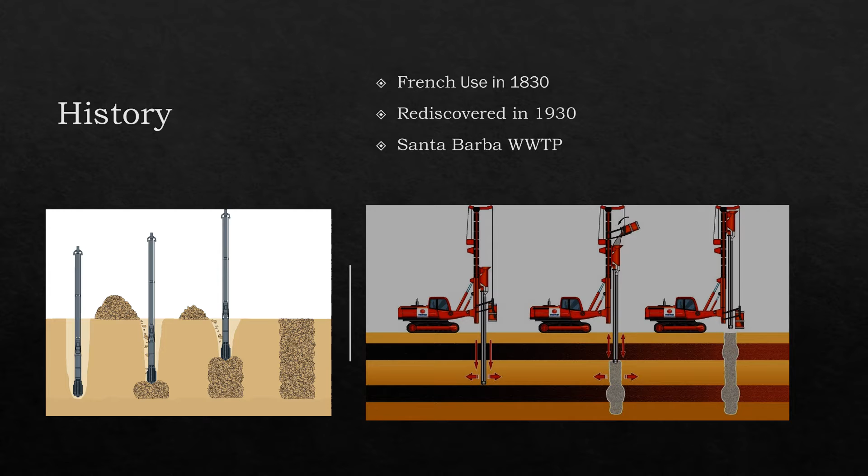What exactly is Vibro Stone Column? Vibro Stone Column is a method used to improve properties of soil so that it can be able to withstand the weight of a structure. Cohesive, mixed and layered soils generally do not densify easily when subjected to vibration alone. Vibro stone columns can be used for erratic soils, which include cohesive soils.

The densification and reinforcement of soils is accomplished by the wet top or the dry bottom feed method during the installation process. Vibro stone columns of dense crushed stones are designed to increase bearing capacity, reduce settlement, assist with densification, mitigate the potential for liquefaction, and improve shear resistance.

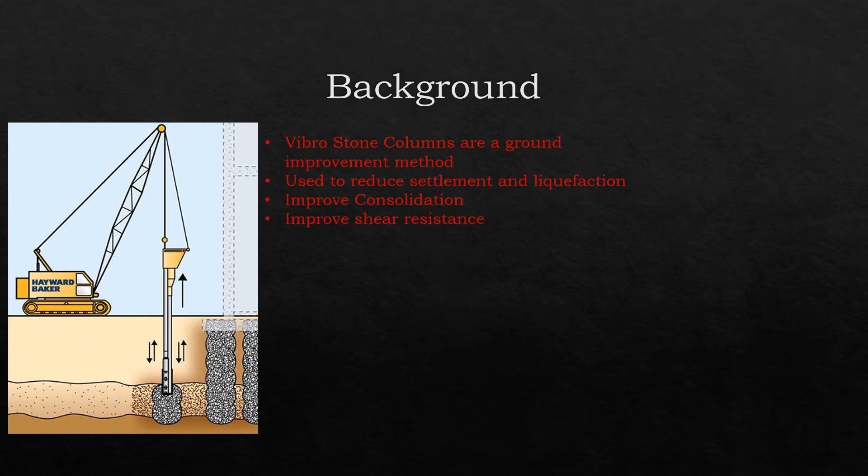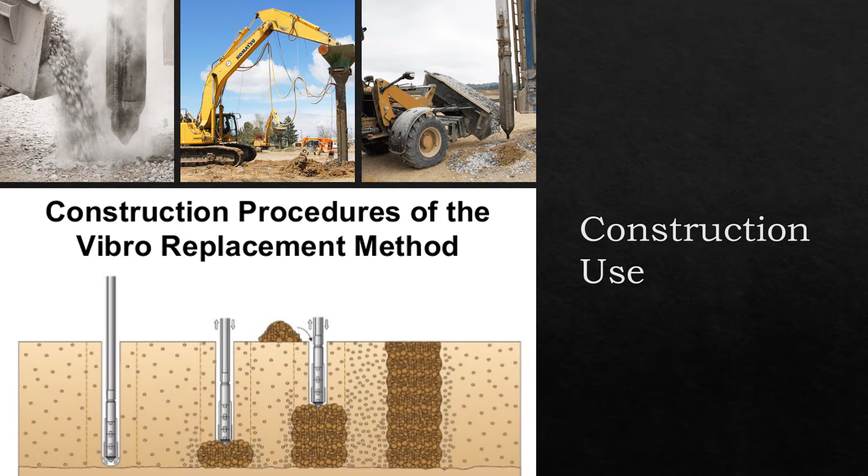When it comes time to install stone columns, there are two methods that engineers can choose from. These methods are the wet top and dry bottom method. The wet top method consists of jetting water as shown in figure 1. It is used to remove soft material, stabilize the probe hole, and ensure that the stone backfill reaches the tip of the vibrator. This is the most commonly used and most cost efficient of the deep vibrator methods.

However, handling of the spoil generated by the process may make this method more difficult to use on confined sites or in environmentally sensitive areas. The dry bottom feed method is a completely dry operation where the vibrator remains in the ground during the construction process. The vibrator is equipped with a pipe which feeds stones and aggregate to the tip of the vibroflot without being withdrawn from the bore as shown in figure 2.

The elimination of flushing water in turn eliminates the generation of spoil, extending the range of sites that can be treated. Treatment is possible up to a depth of 80 feet and is not inhibited by the presence of groundwater.

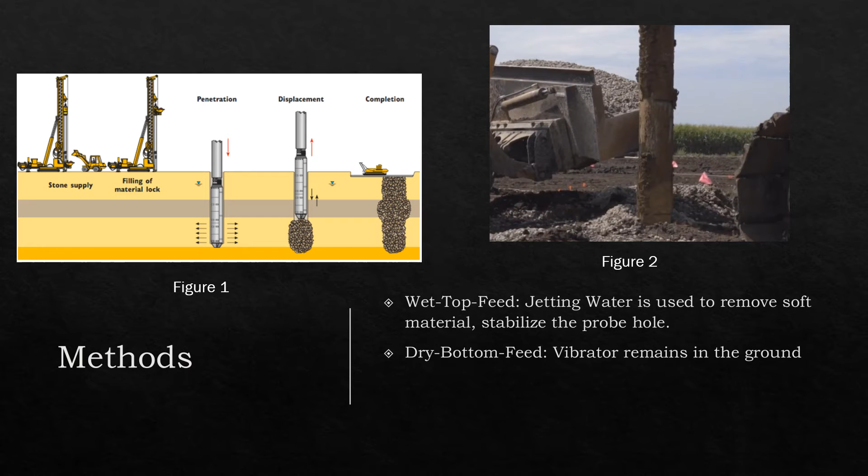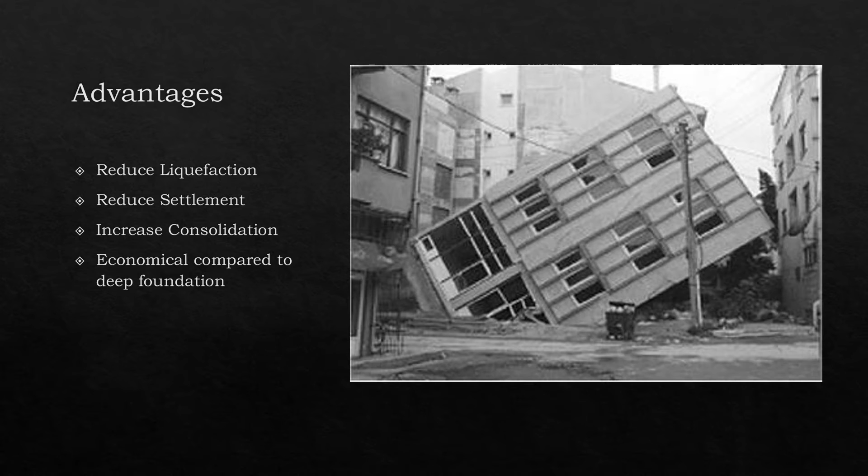The goal of Vibro stone columns is to reduce shallow foundation settlement, increase bearing capacity, which allows reduction in footing size, mitigate liquefaction potential, provide slope stabilization, permit construction on fills, permit shallow foundation construction, and prevent earthquake-induced lateral spreading.

With all things, there is always the probability of things going wrong. The use of stone columns and any other ground improvement techniques requires the user to fully understand why and how such technique will improve the soil that a certain project will be constructed on. Failures of stone columns are the result of inadequate site and in-ground investigation, failure to identify the main risks or deficiencies in the ground, failure to understand the science and application of stone columns, lack of training in installation of stone columns, failure to consider the rate the load is applied in soft soils, and not consulting a stone column specialist.

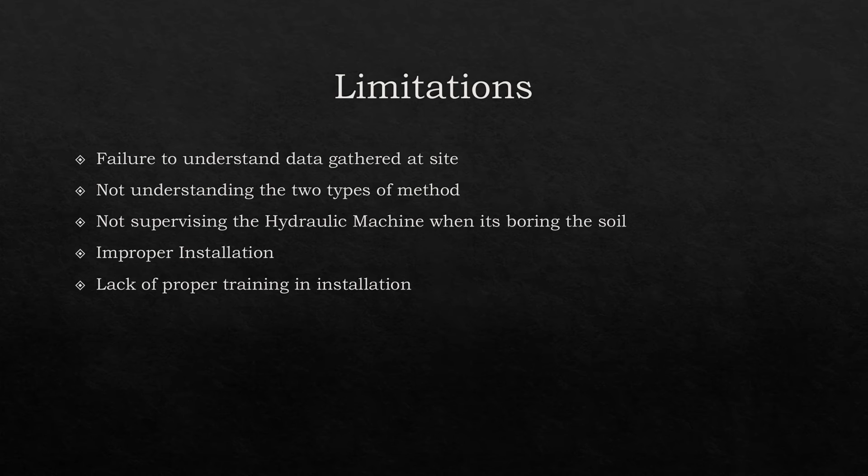For example, the failure of stone columns beneath an 18-meter diameter liquefied gas sphere constructed on a rigid concrete pedestal foundation in India was the result of not understanding the data collected at the site before the installation of the stone columns during testing.

With all the benefits that stone columns have to offer as a solution to improving the strength of a foundation, more research needs to be done to learn more about this soil improvement method. Stone columns are very useful in areas that are prone to earthquakes, reduce settlement, improve rate of consolidation, and prevent liquefaction. As the population of the world continues to grow each year, public transportation will need to grow to meet such demand. As a result, researchers are looking at how soft soil reacts to dynamic loading.

Many researchers have studied the effect of dynamic loading on soft soils. Researchers found that with any dynamic loading applied to soft soil, there is a high settlement problem. In order to overcome this problem, it is generally cost-effective to improve the ground compared to importing materials of suitable quality to replace poor soil. This has additional environmental benefits, and it addresses a sustainability problem. As a result, researchers are currently conducting tests on how to improve soft soils under dynamic loading with the use of Vibro stone columns.

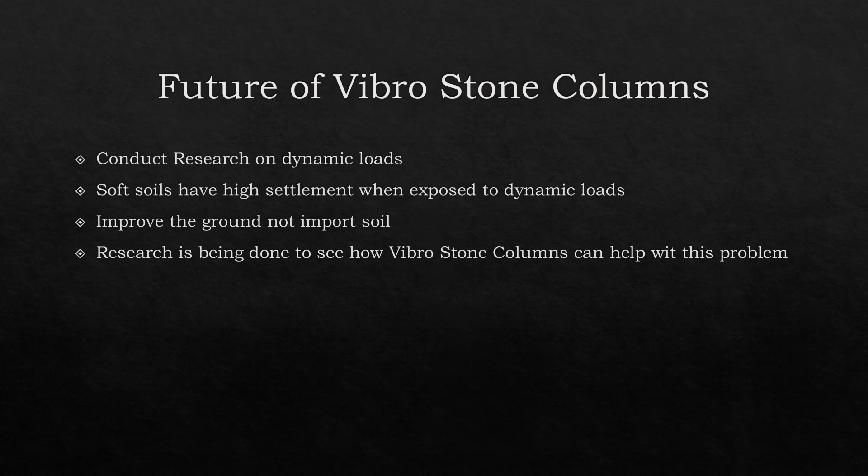Currently, the geotechnical engineering program is designed for structures that have soil properties that are considered strong. In order to expose students to real-life challenges, the use of Vibro Stone Columns should be introduced into the program.

In conclusion, as the population of the world continues to grow, space that was once deemed poor for any engineering project must now be looked at. Geotechnical engineering is becoming important as new ways are being researched to address this issue. Challenges that poor soils have are a weak bearing capacity and being prone to settlement, as was stated before. The use of stone columns within these regions can improve the quality of these soils. As technology and methods of construction continue to improve, the use of stone columns as an alternative method for foundation must be researched thoroughly so that it may benefit areas that are prone to liquefaction, settlement, and poor consolidation.